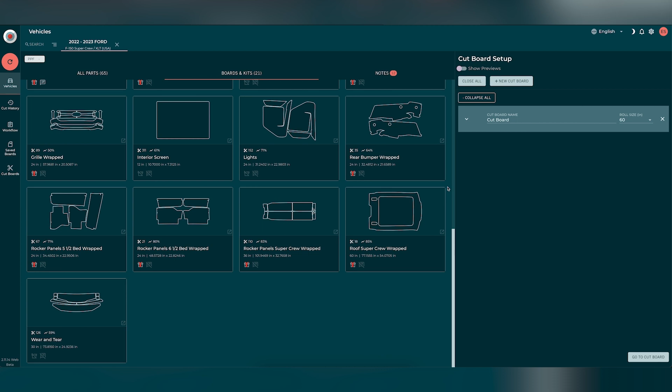So the pre-nested kits are set up in a way to minimize the amount of waste and maximize the amount of material that you are going to be using. I would go with this if I was doing a clear wrap, but since I'm doing the Satin Black PPF, I'm going to get a little bit creative on how I want to do my own layout with all of our kits and stuff.

So let's get going. We're going to start at the front of the truck, and we're going to work ourselves all the way to the back. First things first, the hood. We got a hood pattern over here, and this is a hybrid template where you can see the back is all pre-cut out, and it's got vent cutouts for the hood scoops, and then the front is just a bulk sheet.

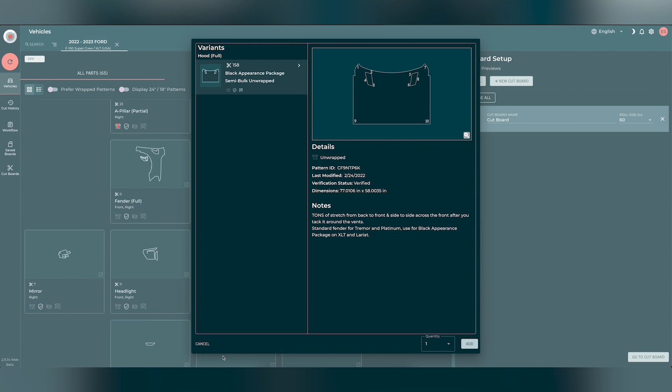Hybrid templates work good, but I'm not going to do that. So instead what I'm going to do is cut an 80-inch long sheet of bulk material, 60 inches wide, and that's what I'm going to be using for the hood.

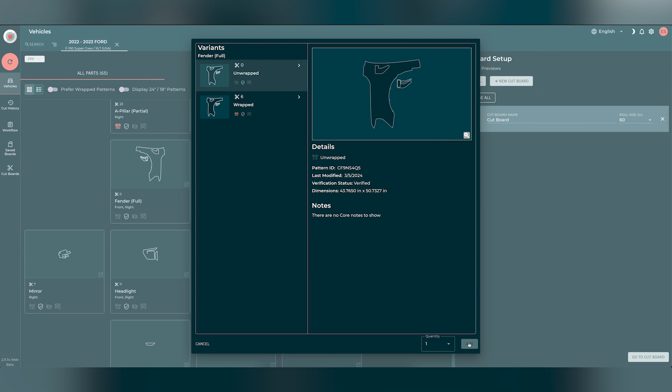So we're going to come over here, let's do the front fenders. So we're going to hit this little box with the arrow, and normally I would hit wrapped patterns, but because we want to go for maximum coverage, we're going to go with the unwrapped pattern, and we're just going to add our own wrap all the way around. So I hit that, and it put both patterns on our cut board.

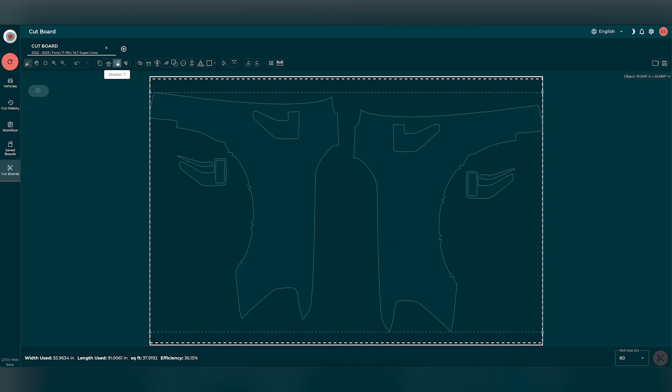So right now we're going to go to the cut board, and here's the standard layout that CORE has. Very first thing I'm going to do is select them both. I'm going to hit the hammer up here, the shatter button, and that's going to separate everything. So I can delete this, I can delete these right here. I'm going to move this fender off to the side, and I don't know why it selected both there. I apologize if this is laggy for you.

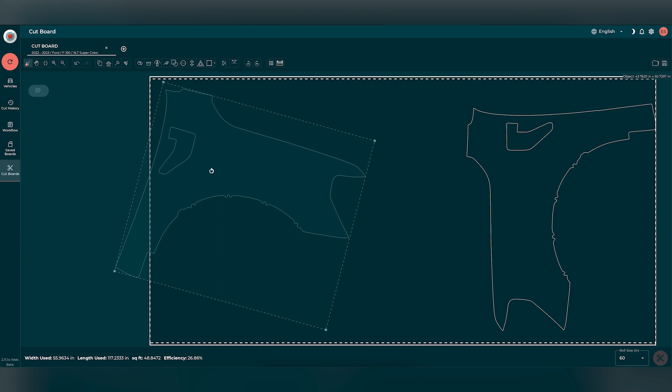So what we're going to do is I want to add a 1/4 inch wrapped edge all the way around. So up over here where it says wrap, you get the little box with the bow on it. We're going to hit that, and here we can pick how much of a wrapped edge we want to give. So we're going to go 1/4 inch, and I'm going to start right over here at this top corner, click that button.

I'm going to go right till here, and I'm going to hit wrap, and then I'm going to start right back over here at that corner. I'm still going to keep that corner notched out. I'm just going to stretch it a little bit over the corner so that we can wrap the film all the way around, but we are going to use that corner for a reference point for starting our installation. So we're going to do a 1/4 inch there as well, and we're going to do a 1/4 inch all the way around the front, because we do want to wrap in behind the headlight the best we can.

On the bottom, we're gonna give an 1/8 of an inch wrap over here because we don't really need a whole lot of wrap over there, just a little bit. Now from here onwards, we'll go 1/2 inch right there. That's good. From here around, we're gonna do the standard 1/4 inch wrap that we were doing.

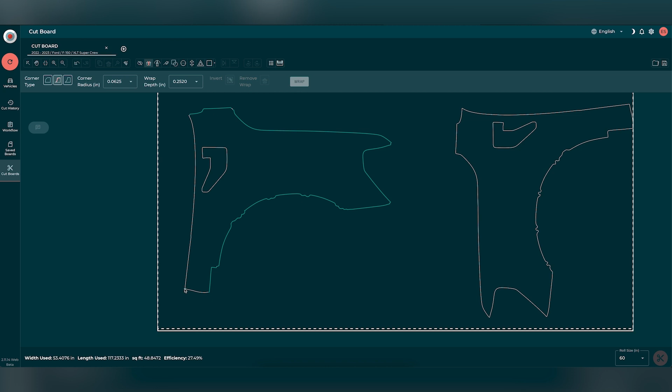I'm not gonna do anything on the very bottom because it wraps so far underneath the truck that I'm not gonna worry myself too terribly much about it. But we are gonna wrap inside the fender, between the fender and the door. So we're gonna go top to bottom, full 1/4 inch there as well too. So that's good.

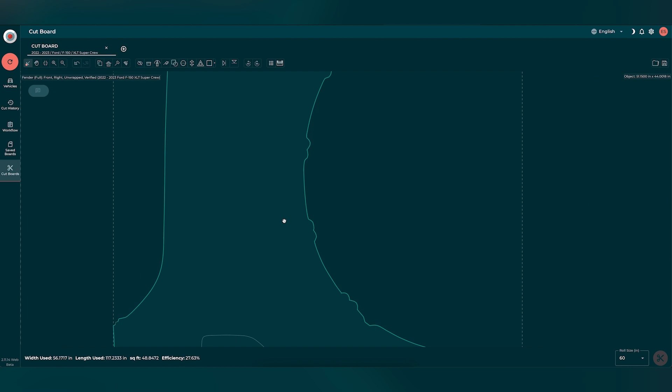Now we're gonna rotate this. Sorry if the screen is all messed up for you guys, I apologize. So we're gonna drag that down over there. Now we're gonna take this fender and we're going to rotate it. There we go.

That's good. And now we're going to do the exact same thing, the exact same wrapped edges. That top corner all the way up to there, 1/4. That's good. And we'll go from here till there. Wrapped edge, 1/4 inch. There we go. Here till there, we're gonna go 1/8 of an inch wrap.

And then from here till there, we're gonna do our full 1/4 inch wrap. Sorry, 1/2 inch wrap. You gotta remember that. And then from here until there, we're gonna do standard 1/4 inch wrap. And then from the top all the way down to the bottom over here, 1/4 inch wrap. And that is what we want.

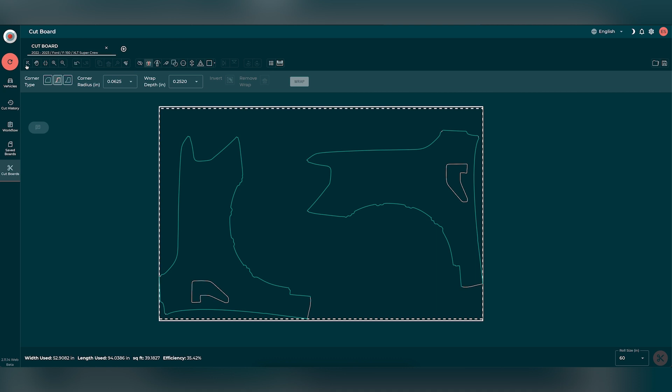Now we're gonna select right over here. We're gonna select the pattern and we're going to rotate it to the best that we can. Come on now, why is our computer being like this?

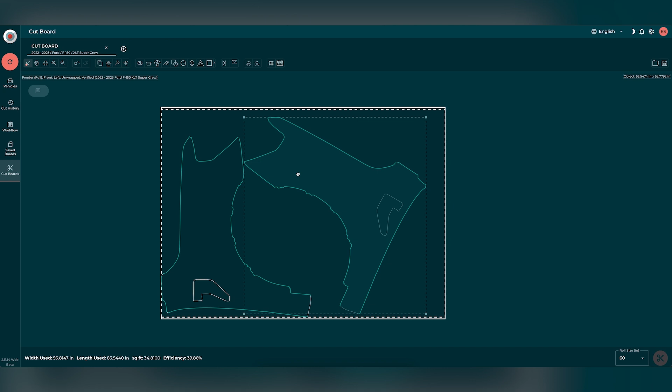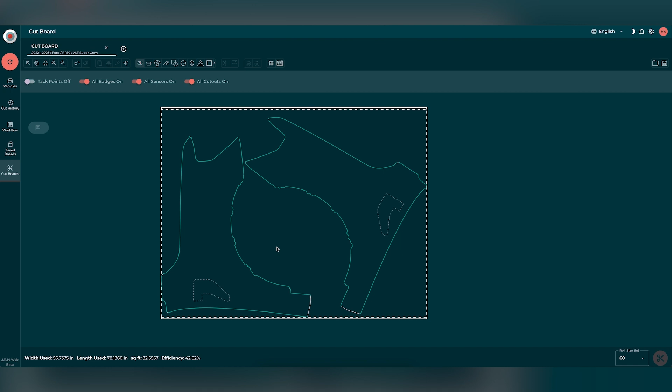And there we go. Last thing I'm going to do is I'm going to hit this little eyeball up here and hit hide, and I'm going to come down here and click on these fender vents. Well, I don't know if they're really vents, but these inserts, I'm going to delete those because I'm going to remove them from the panel so we can do a proper installation on it. Okay, so that's the cut board for the fenders.

Next thing we're going to do is the bumpers. So to do the bumpers, we're going to come back here to vehicles. Okay, so now that we have the fenders done, let's continue on with the front bumpers, and we'll do the rear bumper as well too. So we're going to open up a new cut board. We're going to scroll down. We have our upper bumper.

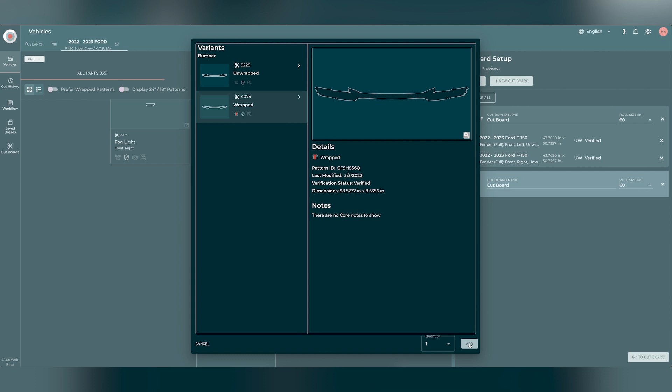So we got two options. We have a wrapped and we have an unwrapped. And we're just going to go with the wrapped option because that's going to provide good coverage. So we'll add that. And then we are going to open up the lower bumper. We're going to go 4 sensors wrapped because that's what we have. We're going to add that.

And then we're going to come down all the way to the bottom and open up the rear bumper. And I do not have the dual exhaust. I mean, I have dual exhaust, but it's aftermarket, so that's not going to affect our patterns in any way, shape, or form here. So we're going to add those. Now we're going to go to the cut board.

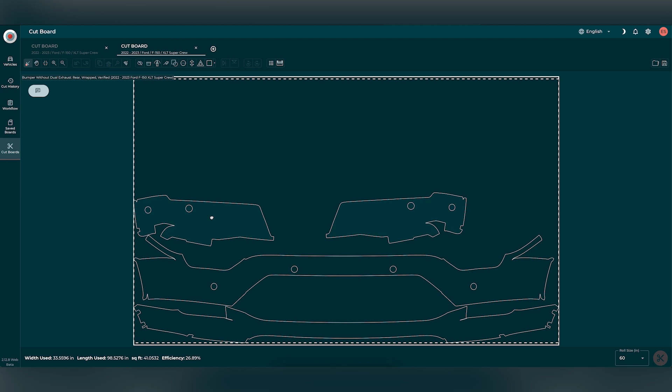And so we got some notes over here from CORE. CORE's notes. You can also put your shop notes in here as well too. But we're gonna get rid of this because we don't need it. So I'm gonna move these out of the way so I can properly work on editing my patterns. So the upper bumper, which is this piece right here, we're gonna start editing first.

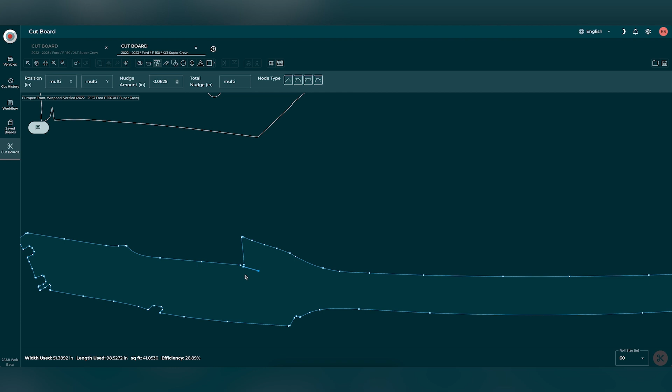So I'm gonna come over here where it says edit node. So that's gonna show all the little nodes that are on the bumper that we can edit. And so we're gonna come right here and we're gonna zoom in. And I don't like this relief cut over here. From personal experience, I know that I can do without these relief cuts. So I'm just gonna circle those, delete them.

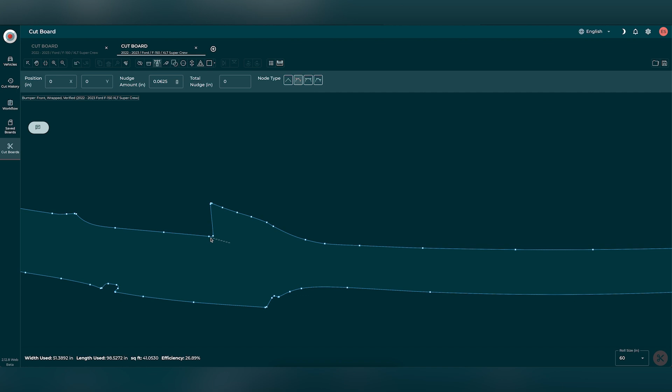And we're just gonna delete this one. We're gonna delete this one, and that's gonna be good. Now we're gonna zoom out. There's some pretty extreme coverage on this upper bumper piece. So what I am gonna do is, I need to move over a little bit here. I'm gonna take and highlight these right there. Actually, nope. We'll just do those ones.

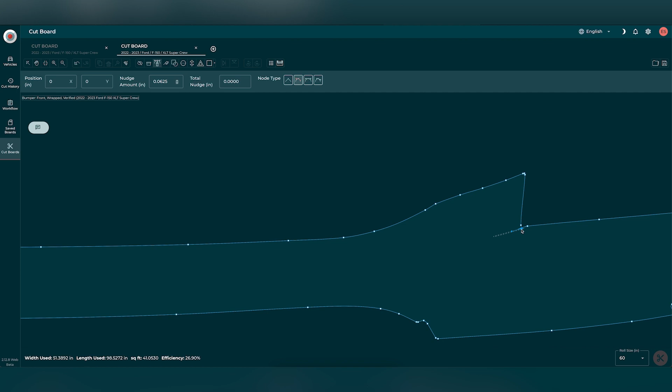And then, delete that. There we go, that's gonna be good. All I'm gonna do is I'm gonna come back up here to wrap. I'm gonna come right up over here and we're gonna go right to about there. We're gonna give that a 1/4 inch.

And I'm gonna do the same thing over here. Because this standard pattern that CORE has, it already allows the PPF to kind of go under the headlight right over here, so that's why I'm not going to add anything. And then all of these relief cuts into the wheel well, we're going to be completely fine. And then this is basically a wrapped edge over here, and I know that this wraps around underneath the upper bumper completely fine, so I don't really have to do much editing on there because this is already such good coverage on this bumper.

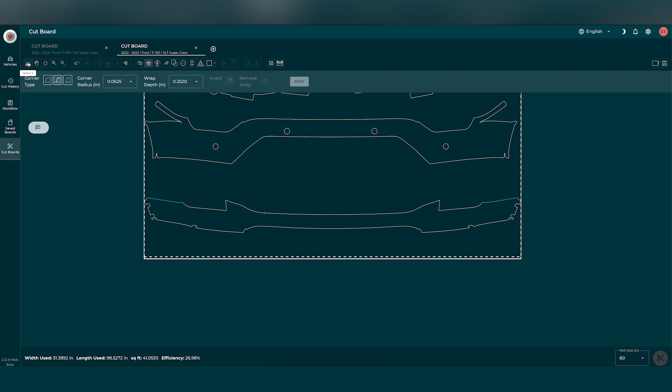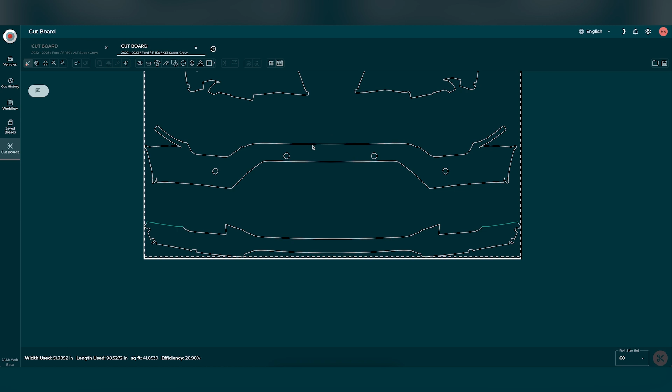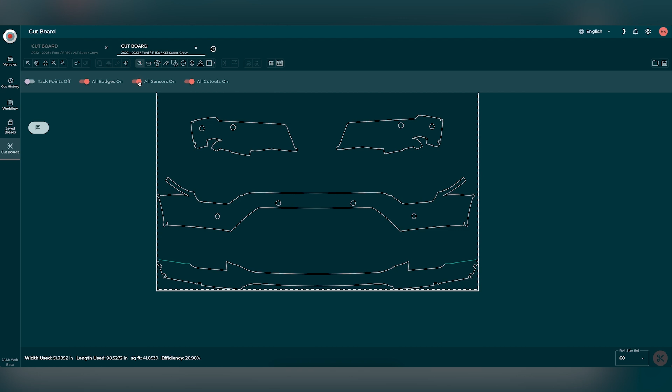So we're going to drag that down. Now what we're going to do is we're going to come up over here and we're going to lower down our upper bumper. Okay, now, mouse. I do apologize. So let's select the lower bumper, and first thing I'm going to do is actually, you know what, let's start by deleting our sensors. So you can delete the sensors just by clicking this button over here, all sensors on. That's going to hide those. Same with the upper bumper, and that's fine.

Now we can go over here to edit node. So on this lower bumper, we actually have this piece that goes up like this. I'm gonna delete all of that. I'm not a fan of that. It works good for the clear wrap, but when we're going for color change, we wanna delete that. And I will show you what I'm gonna do because we are gonna have to add more material there. I'm just changing the way the material is gonna look.

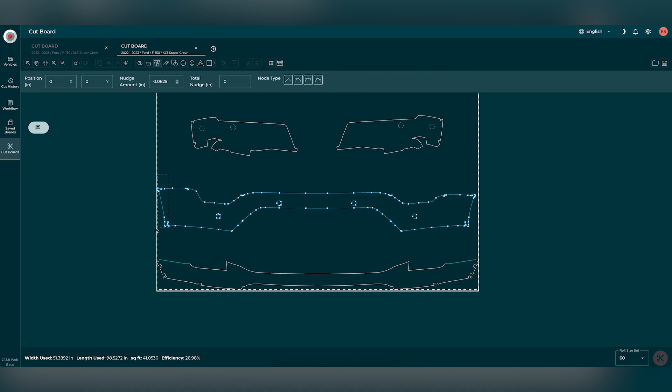Now we're gonna come over here. And actually, no, we don't even need to hit wrap edge, because what I want to do is I want to add a bunch of material to this corner, and I'm just going to lift this up like so. That's good. And now what I'm going to do is I'm going to highlight everything over here because I'm going to have a lot of stretch I need to do, I'm going to pull the film out like that. And then I'm just going to highlight everything till about there. Pull the film down. So we are having an awful lot of trimming that we're going to have to do.

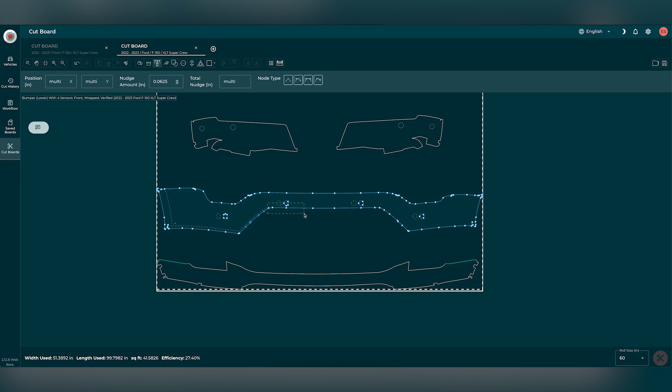Oops, don't want to do that. That unfortunately is just the nature of doing such a crazy wrap. So all I'm doing on the middle over here is I'm just taking my patterns and I'm just making them a little bigger where I need to and a lot bigger on the edges where I have to do so much wrapping, if that makes any sense. There we go. Good. Moving our edges up here.

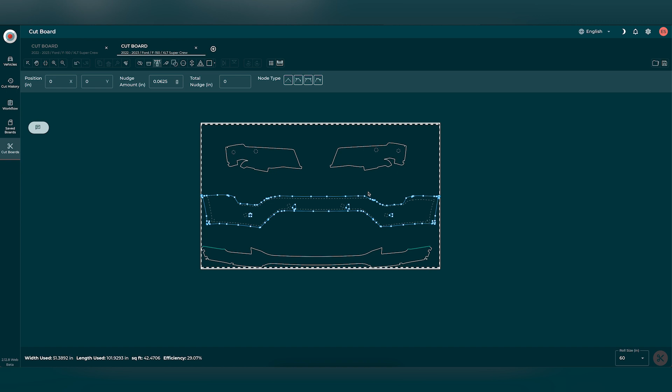And we'll do the same. Oh. There we go. Whoa. Bit too much. Okay, there we go. That lower bumper is good. So I'm gonna bring that down. And then what we're gonna do is we're gonna edit all of the nodes on the upper bumper. So basically, I just need to extend them all, make everything just a touch bigger.

And then I'm just gonna drag down over here because I need to stretch like crazy to get the PPF around. I'm not worrying about those sensors because we've already deleted them. Oops, a little bit too carried away there. And we'll do these ones right here as well too. Okay, so that's that one. Yes, it looks a little bit goofy, but that's fine. Now we're gonna edit the node over here on this side. So I'm just gonna highlight everything on the top.

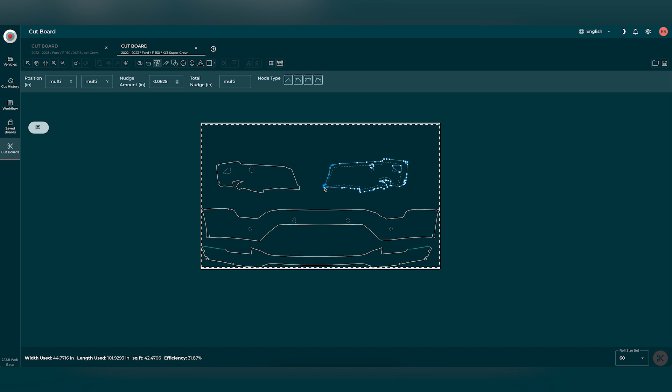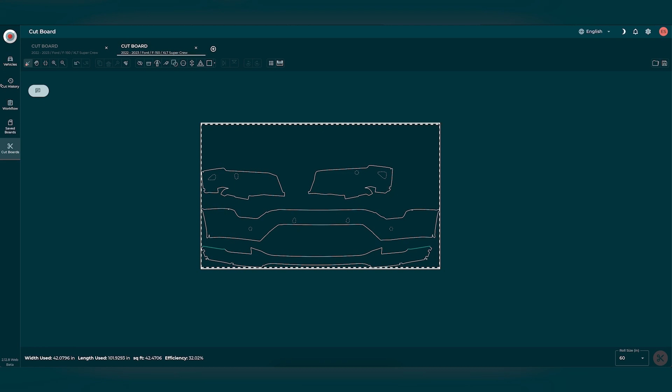Okay, there we go. So we're just going to move that right there. What I'm going to do right here is take all this excess material off. Instead of throwing it away, I'm just going to roll it up and I'm going to use it for scrap or for any smaller jobs that I might have where I need satin black paint protection film. Okay, bumpers are done. Let's go back to vehicles and let's keep moving our way around the vehicle. We're going to open ourselves up a new cut board. We're gonna scroll down.

We're not doing the roof. The roof has already been wrapped in satin black vinyl. To be honest with you, I never want to do another one of these roofs ever again. They are horrible, as putting it lightly.

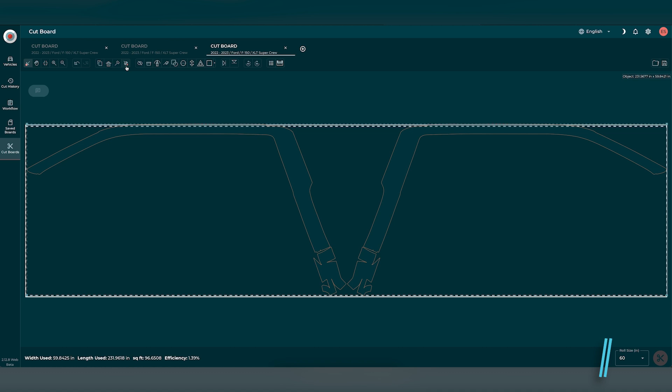So right now we're gonna do our A-pillars. That's gonna be its own separate cut board. Now what I'm gonna do is I'm just gonna highlight everything and hit the shatter button. These lower cab corners, I'm gonna go ahead and delete those because I'm just gonna end up bulking them. Now, how do I edit these ones? Very simple, I'm just gonna hit the wrapped edge button.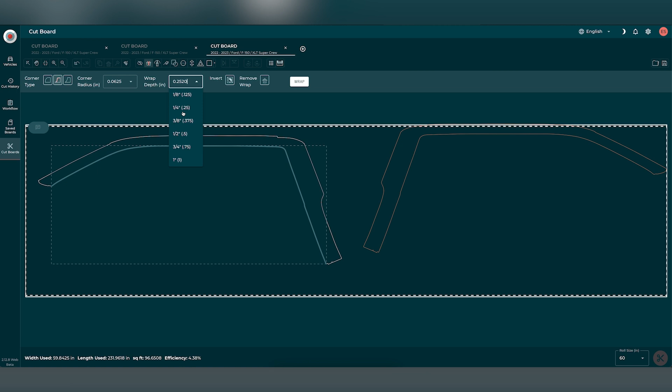We're gonna come over here and give ourselves a 1/4 inch wrap on the inside. We'll hit the wrap button. We're gonna give ourselves an extra 1/2 inch on the outside, which we're gonna go right up over here. That's good, and then from there we'll go all the way forward. Hit the wrap button.

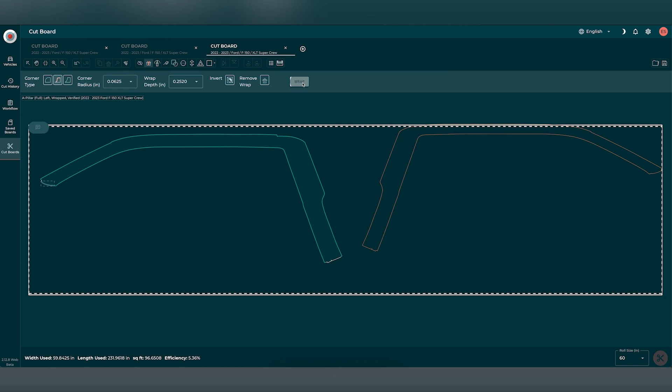And we're gonna come down over here and give ourselves probably about a 1/4 of an inch on the front. Okay, that's good. Now what we're gonna do is we're gonna take and move this over.

Again, I didn't do anything with the bottom because the bottom is gonna be, we're just gonna stretch it into place. We'll have enough material to do so, but we're gonna add our 1/2 inch all the way around over here.

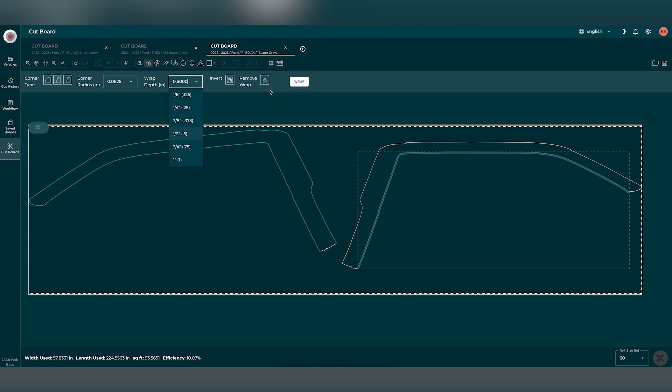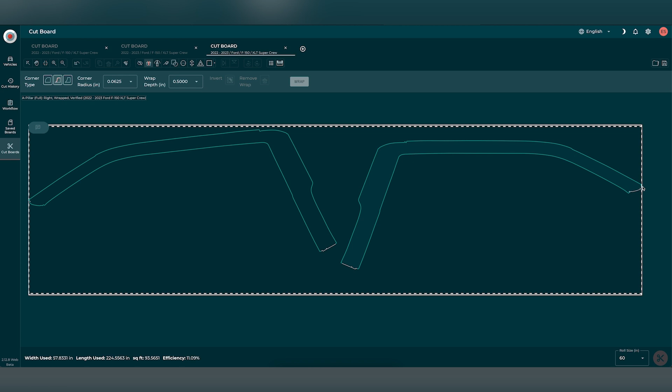Have to change it over to 1/2 inch first. We're gonna do 1/2 inch from here up until there. There we go. And then I need to do a 1/4 inch right over here.

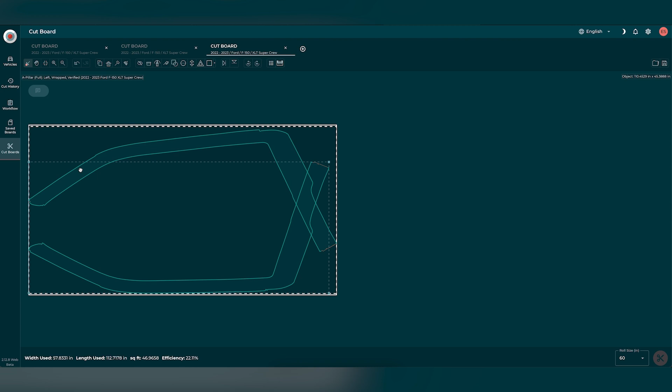Good. Now, how am I going to do this layout? I'm just going to highlight it, and I'm just going to rotate this, and we're just going to drag it into place. Rotate this one a little bit, and we're just going to leave that right there.

Again, what I'm going to do with all this material right here, I'm just going to cut this out and we're just going to leave this in our shop for scrap film, because with satin black paint protection film, we will have a bunch of different places that we can use it for little odd jobs and that type of stuff. So this may be considered waste at this exact moment, but by the time this is done, all that material, it will not be wasted.

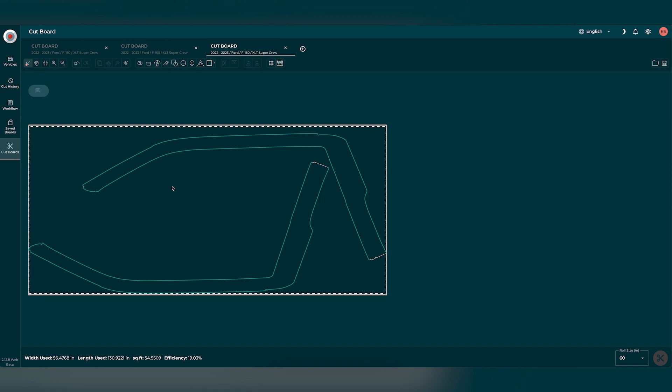So we're going to come back to vehicles and we're going to move on to doing the doors now. So we got to open up a new cut board. I'm going to do the doors in two sections, or two separate cut boards. So we're going to do the front doors in one, go to cut board, and then we're going to do the rear doors.

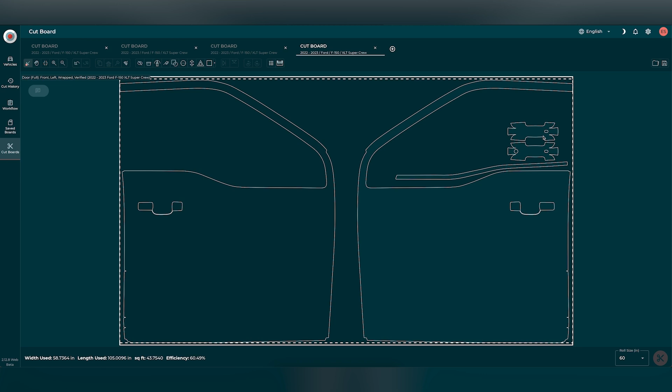Same thing that I always need to do is just going to highlight everything and hit the shatter button. I'm deleting the door handles because I can do a better job bulking them, I believe. And this strip right here that I'm deleting, it's actually a texturized rubber, so there's no point in me even trying to wrap that because no paint protection film or vinyl would even stick to that.

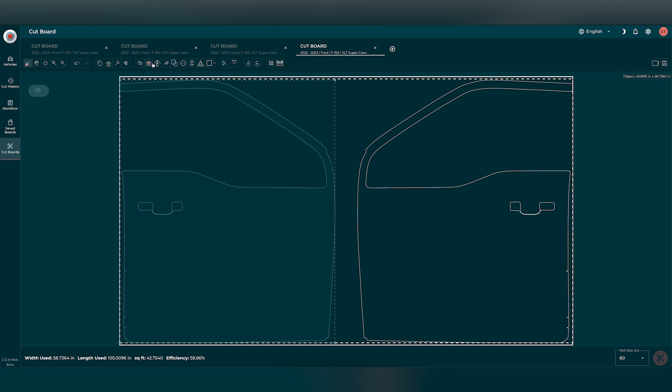Now, as far as what we're gonna wrap on the truck, we're gonna delete the door handles because we're gonna remove those from the vehicle. So I'm just gonna come over here, hit edit node, and I'm just gonna highlight the door handle and delete it.

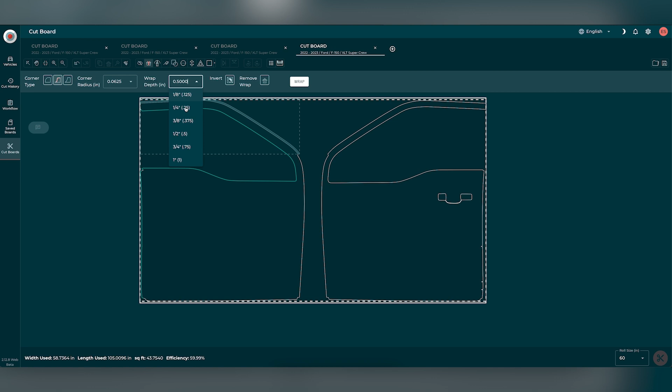Now as far as how much material I want to wrap, I'm going to come over here and go all the way up till here to the top, and I'm going to give myself 1/2 inch to wrap. And then from this corner over here down to the bottom, I'm going to give myself 1/2 inch as well too. And then up along the very top, I'm just going to come around till about here, and I'm going to give myself about 1/4 inch on the top, because that's all that's necessary.

And then this front edge, basically from where the 1/2 inch started all the way down to the bottom, we don't really have a whole lot of room to work our wrap there, so we're just going to do 1/8 of an inch, and that's going to be good. We won't have to do anything on the very bottom. In fact, the bottom has a texturized paint on these Fords, so PPF doesn't like to stick to that stuff too terribly well from what I found, so I'm not overly concerned about wrapping it fully on the bottom, because just the way the doors are cut or cornered at the bottom there, and with the fact that we got running boards there, no one's ever going to really see that part.

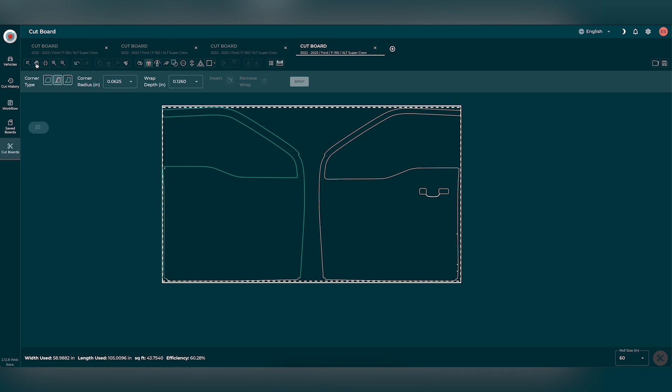So now we're going to come over to this door, we're going to select it, and we're going to delete our door handle.

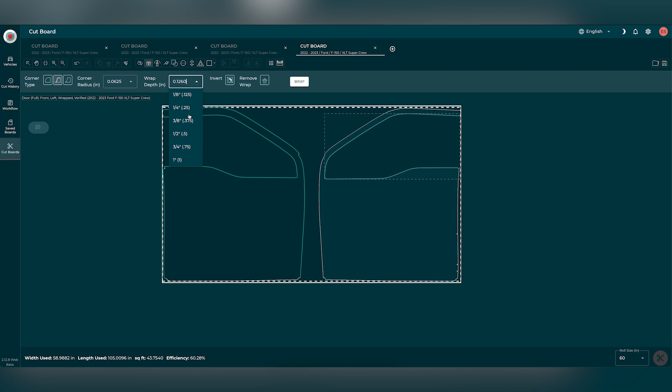And then we're going to come over here to wrapped edges, and we're going to do the exact same thing that we did before. I'm going to add 1/2 inch almost all the way around. Top, we're going to add our 1/4 inch.

If you guys are still watching, still paying attention, you're crazy, and I do appreciate you. And Lloyd, I know you are watching this, because you are crazy. You watch almost everything we post, so thank you.

Now we're going to come back to the top over here, and we're going to add our 1/2 inch, and we're going to hit wrap.

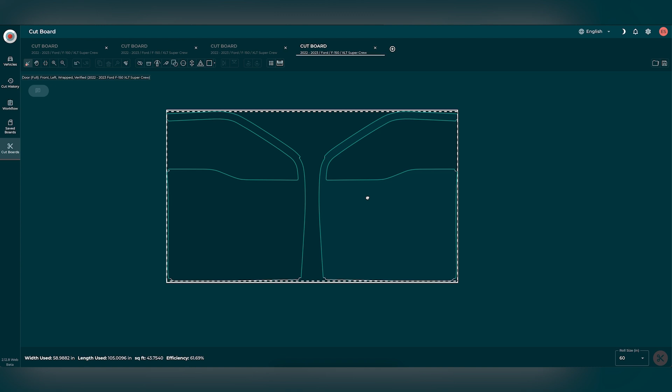So this right here, when it comes time to actually plot this, is going to be pretty tight to plot. As you can see with Core, you got these dotted lines that go all the way around the perimeter. So those lines are your bleed lines. Basically, you can see the width used is a 60-inch roll, so we're using just about 59 inches of width. Core likes to leave a nice gap all the way around, so we're not cutting right close to the edge, but we are still under 59 inches, so we will be fine to do this.

I'll just plot them like this, and we're just going to separate them right down the middle.

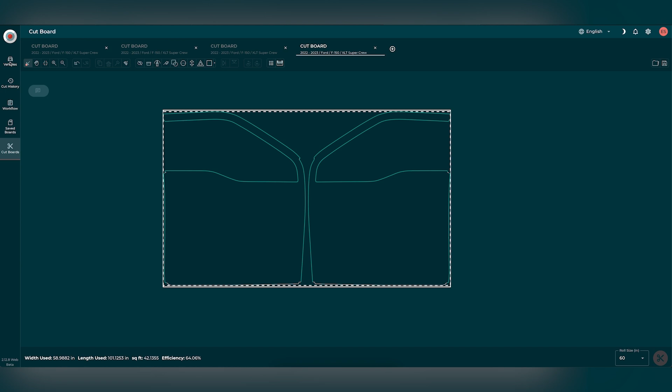Now let's go back to vehicles, and let's do the back doors. And we're going to go new cut board. We're going to load up these back doors.

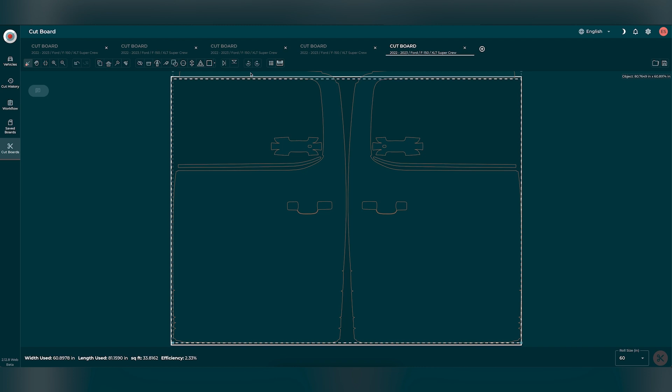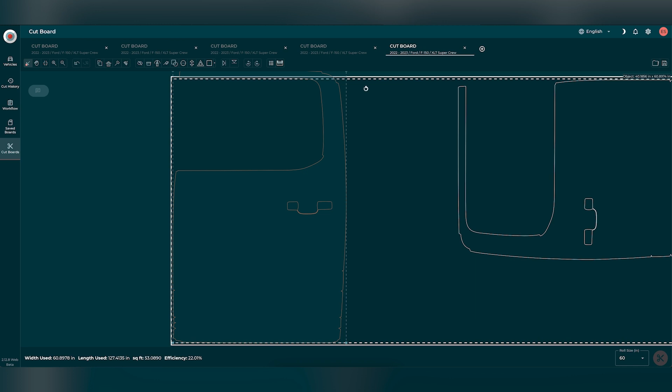Now these back doors, we are going to have to do them very differently. So we're going to hit shatter. We're going to delete these door handles, and delete that trim. And we are going to take these doors and we're going to rotate them, because we will not be able to edit them if they're bleeding over.

Okay, the exact same way we did the front doors, 1/2 inch over here. I'm gonna do a 1/2 inch from there till there. We are gonna pop these seals off, or these trims off over here and wrap in,

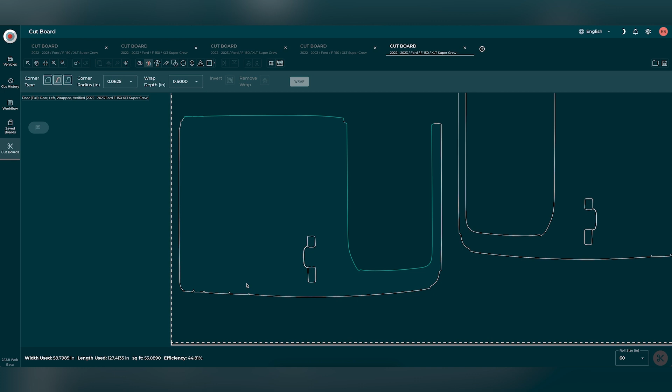so it's gonna look really, really nice. It's gonna be really clean as well too. We're gonna come down here, we're gonna go 1/2 inch all the way up till there. And then this very top edge, we're gonna give ourselves a 1/4 inch and go right there.

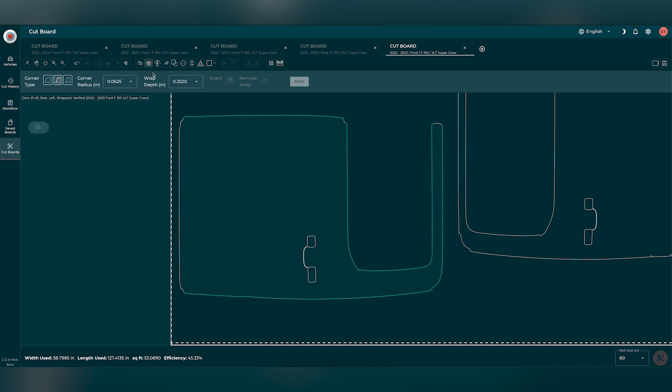And then what we need to do is we need to delete the door handle. So we're just going to highlight that and delete it. And that is good.

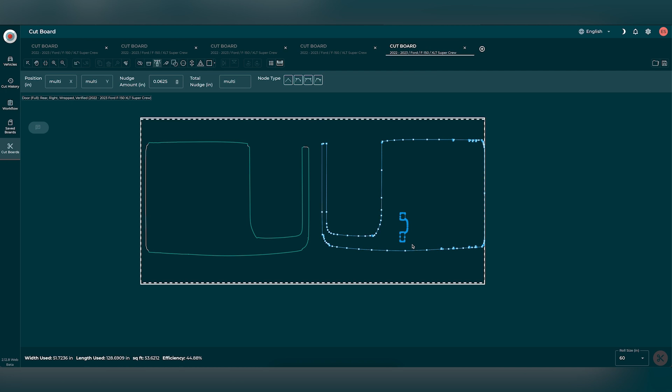Now we're going to come over here, and we're going to start off by deleting the door handle. So that's over and done with. Delete, that's good. Now we can add our wrapped edge.

So we're going to start on the inside right here, down till there. It's going to be 1/2 inch. Half inch there. We're going to do a 1/4 inch right over here.

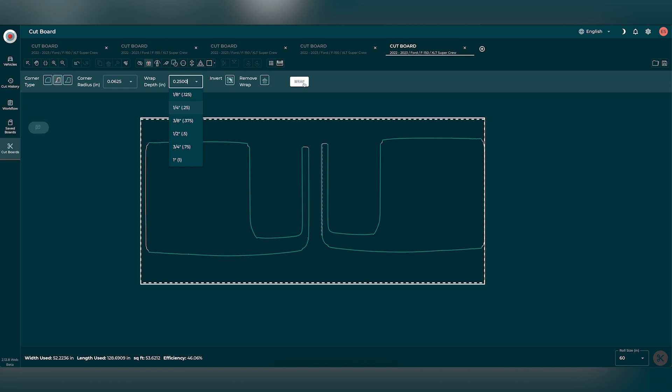That is our rear doors, so that is good.

We gotta go back to our cut board. So now what I'm going to do is I'm just going to take it and pull them down over here, just like so. And just like our front doors, I'm going to get them nice and close together, so that when I plot them out, I can take and separate them.

And same thing, all this material right here, we're just going to separate that, and we're just going to use that for scrap material or for other small projects that we may have.

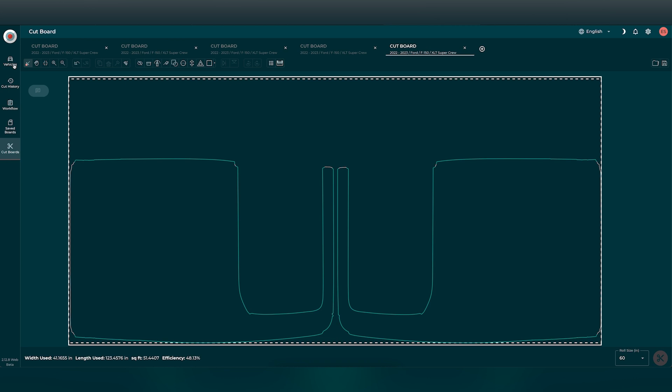Now we're going to come back to vehicles. We're getting close to being done.

Like I said, if you're still with me on this, I really do appreciate you and your willingness to spend your time learning with me.

And we're going to do the box sides next. Now we have the 5.5 foot box, so it's going to be a wrap pattern, and we added that to the cut board. There we go. Just taking a little bit of time to wake itself up.

I'm going to separate this now. What I'm going to do is I'm going to hit the shatter button. I'm going to delete these different fuel caps, because you got one here with a relief cut, and then you have one here with none. I'm going to do these bulk anyways.

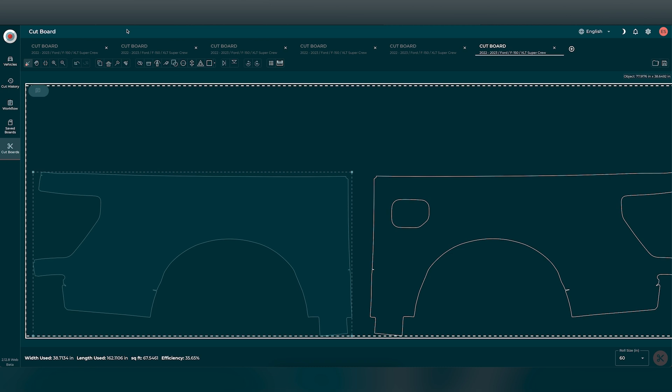I don't really want to do them with a pattern. For this one over here on driver's side, no, sorry, this would be the passenger side. Really, the only place that I'm going to add material is going to be inside the taillight area over here, because we are removing the taillights, and we're going to give ourselves 1/2 inch there.

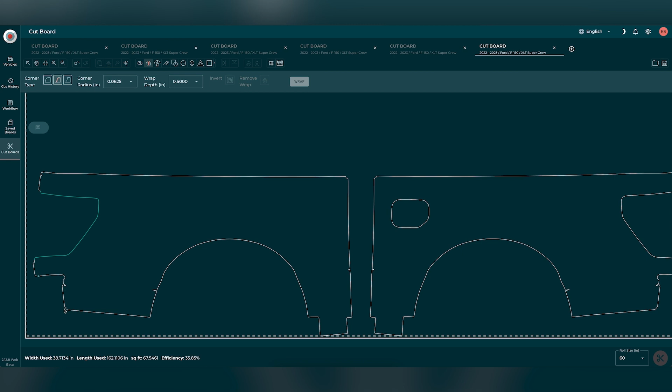And then I'm going to come right over here and come all the way down till about here, and we're going to give ourselves a 1/2 inch there as well too. And then on this leading front edge right over here, we're going to come right down till there, and we're going to give ourselves a 1/2 inch wrap. There we go. And then what I'm going to do on the wheel well itself, we're going to give it

a 1 inch wrap, because we want to wrap absolutely everything in the wheel well, because that gets hammered and destroyed the most with stone chips. The reason I'm not doing anything over here is we do have a black

plastic trim piece that goes over here that is going to cover all this. And actually, you know what, let's go one step further, and we're going to go a 1/4 inch. I'm going to add maybe about a 1/4 inch right here, and we'll hit wrap. But this bottom edge right over here butts up against the black trim, and I don't want to do anything with that, so we're just going to leave that. And then up along the top as well too, this is already designed to wrap around that edge properly.

So if anything, what I'm going to do is I'm going to just start my installation with this up a little bit higher, and then because of all this excess material over here, I'll be able to get everything else to lay into place properly. As you'll see in the installation video, what I'm all talking about there.

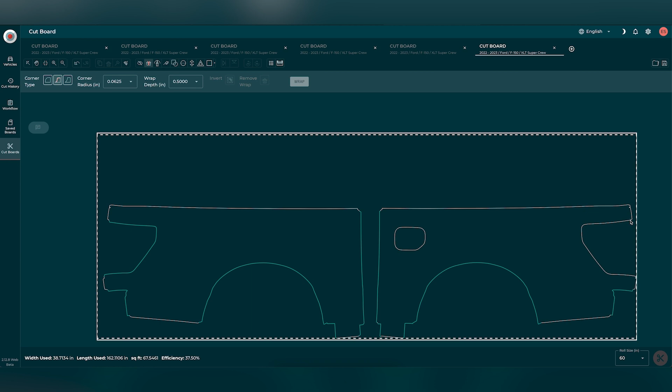And then what I need to do is I need to delete the fuel door. Actually, no, we're not going to delete the fuel door. We're actually going to make the fuel door smaller so we can wrap inside nicely.

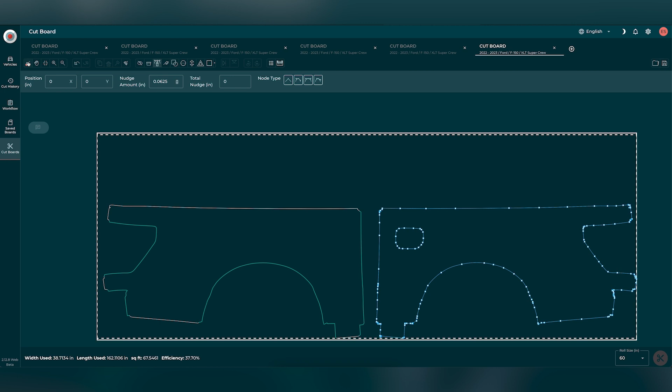So we're just going to make that a little bit smaller. There we go. That right there is good. So I'm not sure why it's not showing up green on this one, but not green on this one. I don't know why, but everything is still edited. Yeah, and same thing over here, all this material up here, we're just gonna be using that for scrap.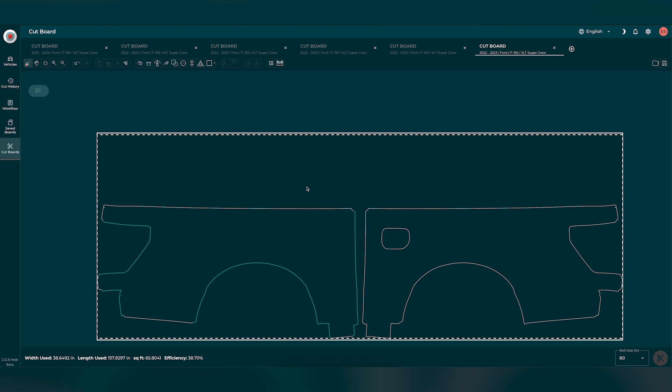So I guess now the only thing I have left to do is just move this around so we can plot this nicely. Now, yeah, we're gonna separate this, and that is basically gonna be it as far as patterns go when it comes to the tailgate.

Down here at the bottom, tailgate, we're gonna take it off the truck and we're gonna do a bulk PPF install on it, just because we can do so much of a better installation on it.

And these pieces right here, I'm actually gonna get these done in a vinyl, not vinyl paint protection film, but it's gonna be done in a satin black vinyl, just because of how many relief cuts and whatnot there are. Paint protection film, with it being as thick as it is, it just can't take to these sharp corners enough. And since we are going color change, I don't want any blue showing over here, so we're gonna have to

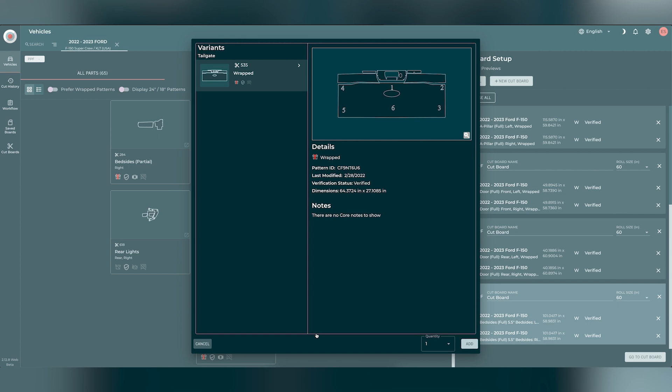settle with vinyl over here as well too. And the same with our door handles. The door handles are gonna be done in satin black vinyl as well too. So yeah, that is gonna sum up this video on how I would take and get all my patterns set up for doing this. Yeah, right now we're ready to cut, so we'll include some cutting footage and weeding footage as well too, of cutting and weeding the satin black PPF.